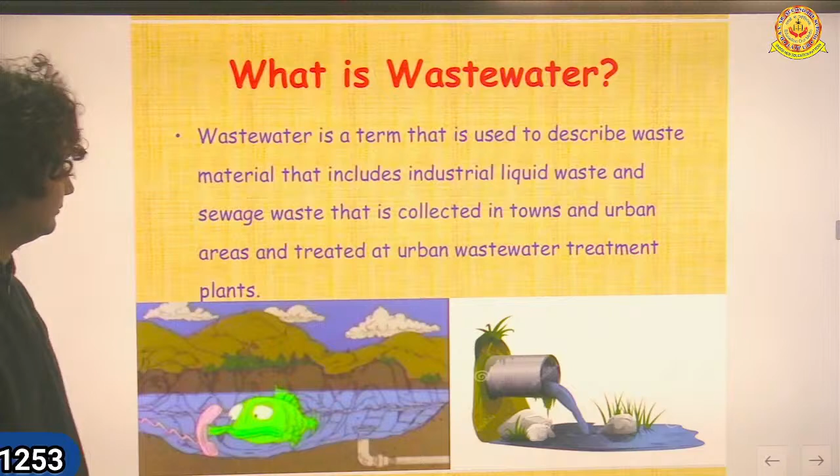See, how many times aquatic animals also are not able to live. They will die if we do not treat it well.

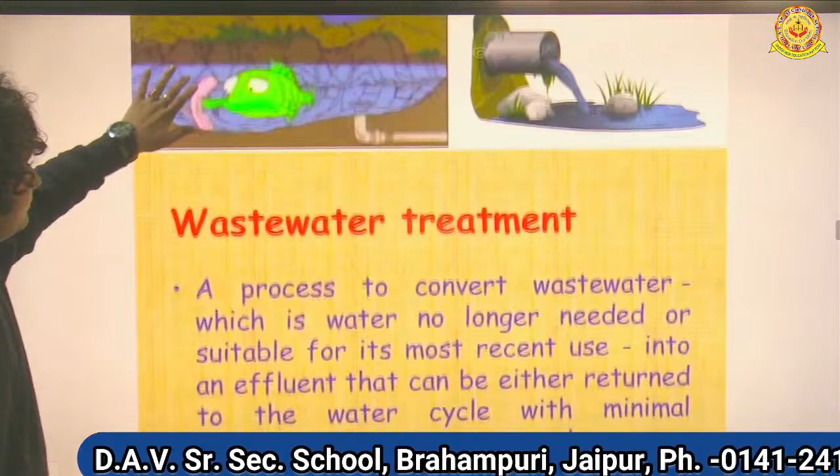Now, wastewater treatment is a process to convert wastewater, which is water no longer needed or suitable. Here, no longer needed or suitable means that is dirty water. That's why we say wastewater.

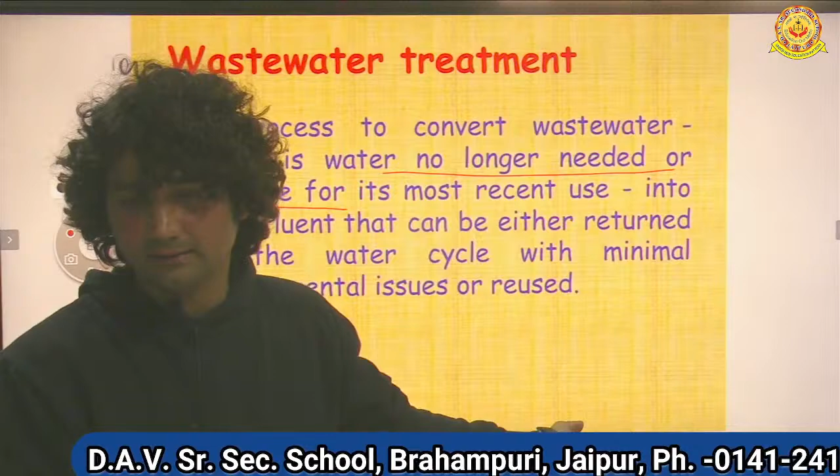It is a wastewater. So its most recent use is into an effluent that can be either returned to the water cycle with minimal environment issues, or reused. So this wastewater we can send to recycle and reuse again in the garden by removing dirt, by removing germs, bacteria.

So you all know what is wastewater treatment. Wastewater treatment is a process to convert wastewater into reusable water. We reuse this water again to give plants in gardening, for washing cars, bicycles, scooters.

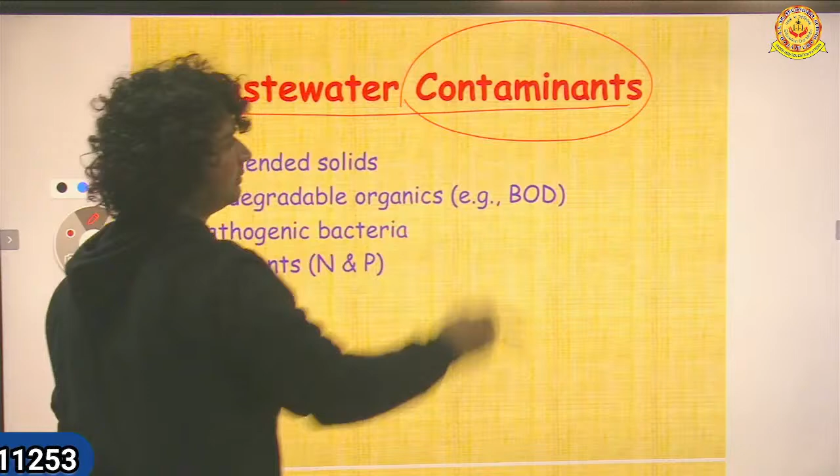Now, wastewater contaminants. So what do you understand by contaminants? Contaminants means it contains germs, bacteria.

So it is suspended with solid particles and biodegradable organics. Example, biodegradable waste. These are also included in wastewater.

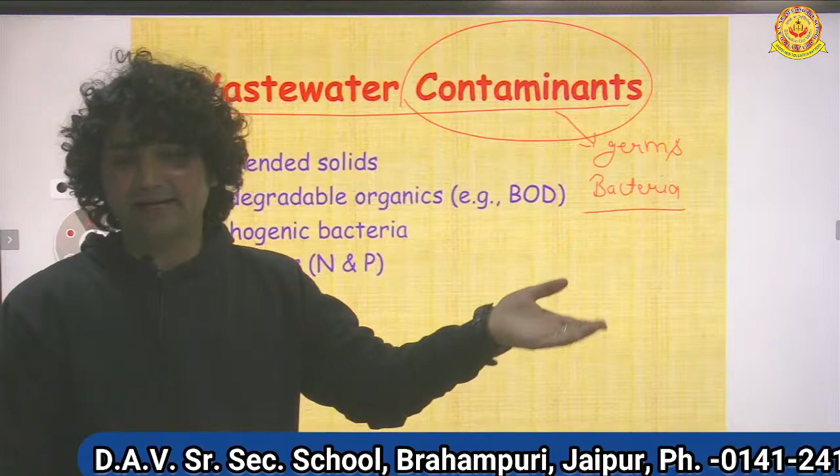Pathogenic bacteria and nutrients. Many times you have seen in the drains that water is too dirty. Bacteria in it. If someone drinks that water, what will happen?

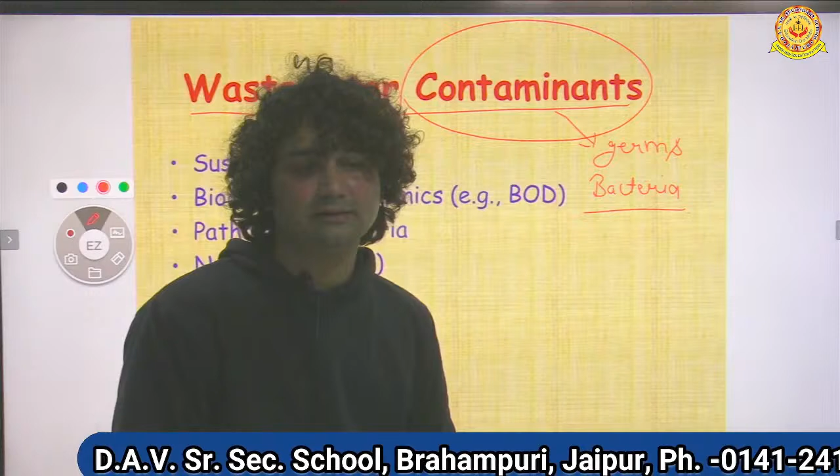They will not die, but it will cause a disease. They will have a disease, because that water is contaminated. In contaminated water there are germs and bacteria.

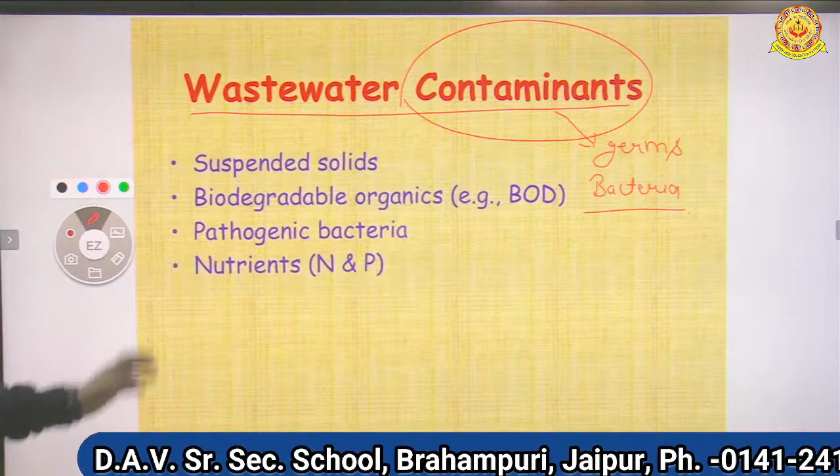Now you have understood it. What is wastewater contaminants? So wastewater contaminants, it contains germs and bacteria in it.

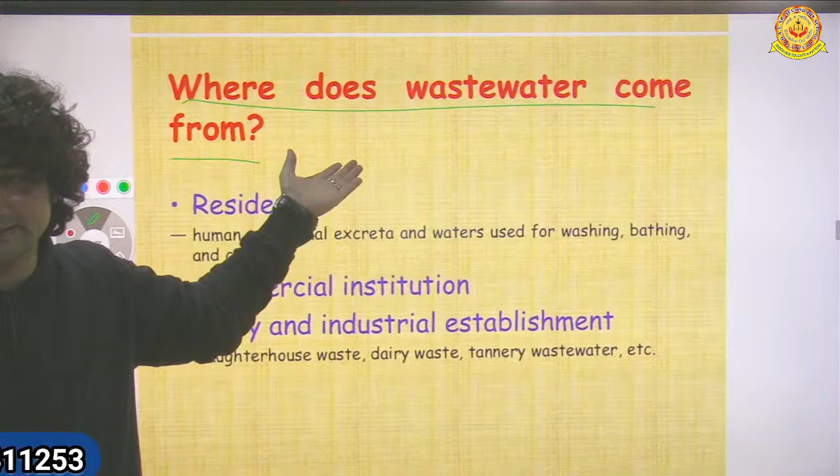Now, where does wastewater come from? This is the question. It has come from the households and industries, many large industries. It comes from and goes into the oceans and makes water polluted.

So it comes from the residences. You all know human and animal excreta, and water for washing, bathing and cooking. After that the water is wasted or made dirty, then it is sent into the ocean, seas, large seas.

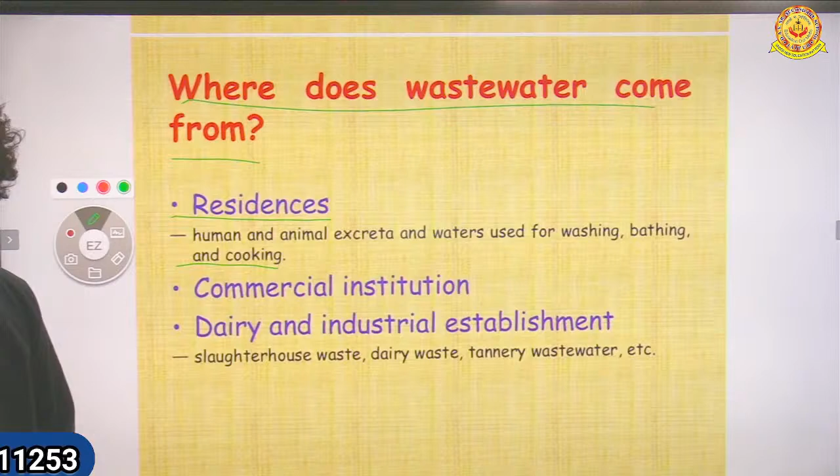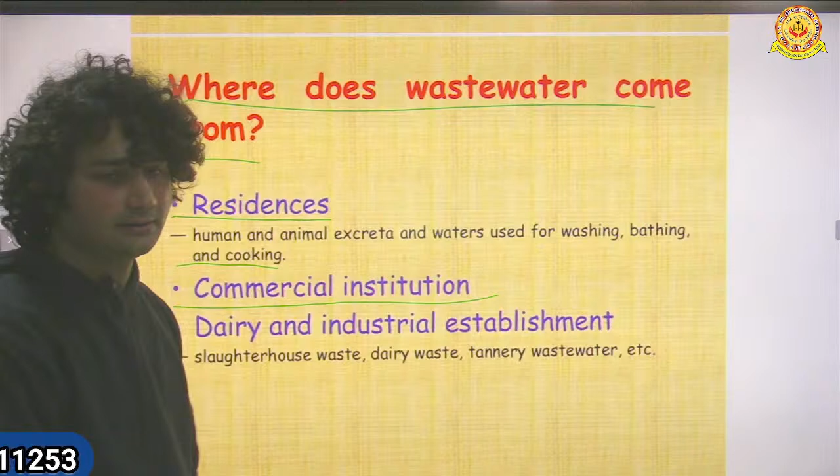It comes from commercial institutions. Many commercial institutes are there. From there they will release a large amount of wastewater.

Then dairy and industrial establishment: slaughterhouse waste, dairy waste, tannery wastewater. From there it also releases a large amount of waste. In a dairy waste we need to wash cattle also, animals. In industries we have to remove dirt. Many large industries also make fertilizers, so they use water and release wastewater.

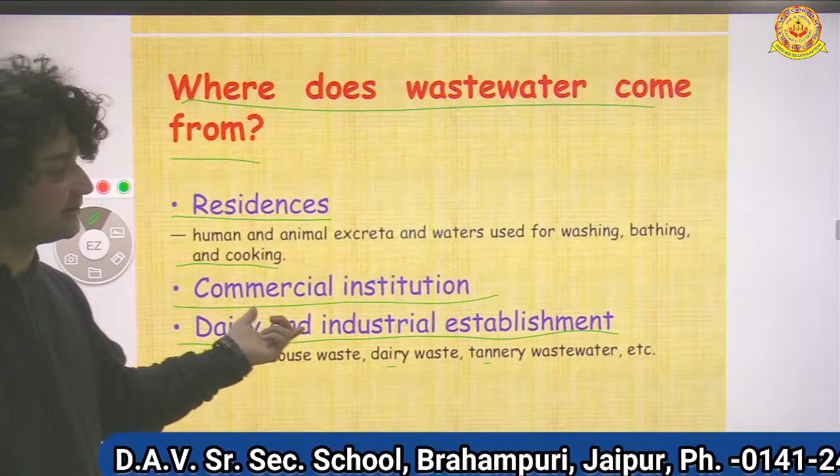So you all know where does wastewater come from? It comes from residence, meaning household, your house, and commercial institutions, and dairy and industrial waste, or large industries.

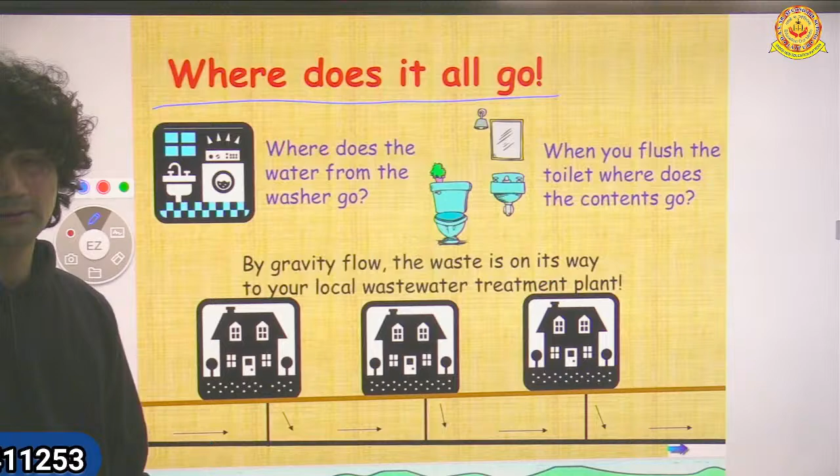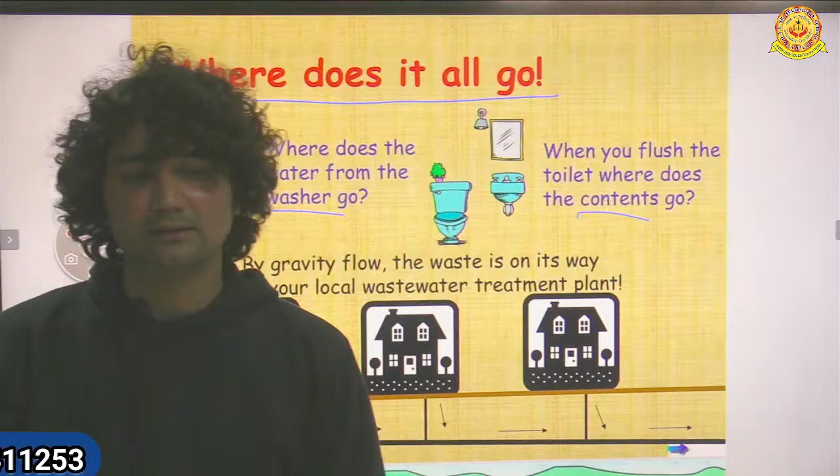Now, where does it all go? First, where does it come from? It comes from household or industries. Where does the water from the washer go? When you flush the toilet, where does the contents go? All the contents, contaminated with germs and bacteria, by gravity flow, the waste is on its way to your local wastewater treatment plant. From your household or your industries, it goes to the wastewater treatment plant.

Okay, who will give the answer? What would happen in a wastewater treatment plant? In a wastewater treatment plant, we remove the dirt and dust from it and make reusable water, so we can reuse it again and again.

On our earth we have 70% water and 30% land. In that 70% of water, we have only 1% fresh water. That's why we have to use this water carefully. We don't have to waste this water.

Many places you have seen there is no water. So how can people survive there? That's why we have to reduce this. Reduce less and reuse again and again.

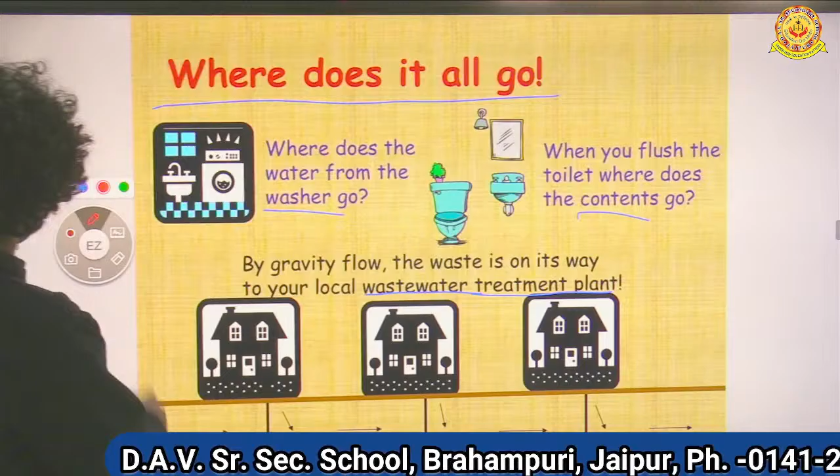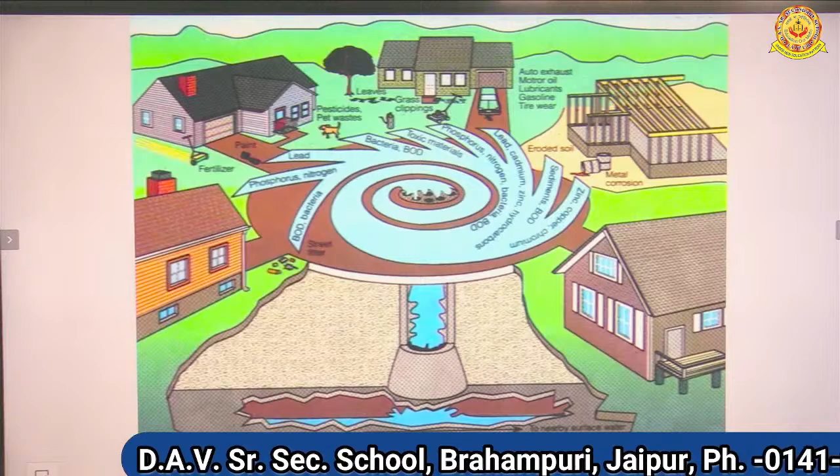Now the question is, why treat wastewater? Why is it necessary to treat wastewater? First, it causes a demand for dissolved oxygen. We treat wastewater to increase the level of oxygen in it.

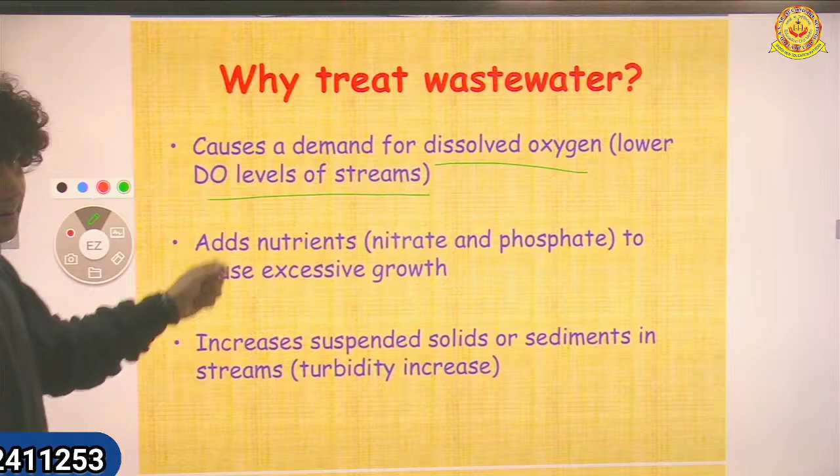If there is more dirt or germs in the wastewater, the oxygen level decreases. That's why we have to treat this wastewater and increase the oxygen level in the streams. By increasing the oxygen level, it cannot harm aquatic plants or animals. If the oxygen level decreases, the aquatic plants and animals will die because they are not able to take in oxygen that is soluble in water.

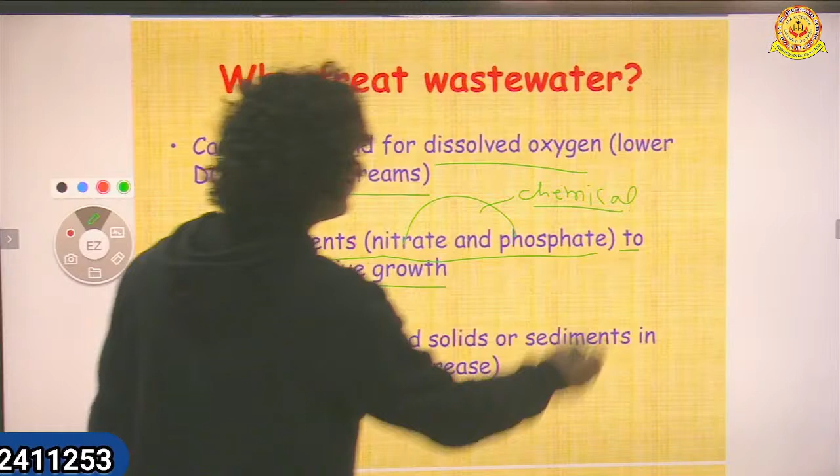Now, it adds nutrients like nitrate or phosphate to cause excessive growth. We need to consider nutrients in the form of nitrate and phosphorus, which are chemicals, because we have to stop this excessive growth of bacteria or contaminants.

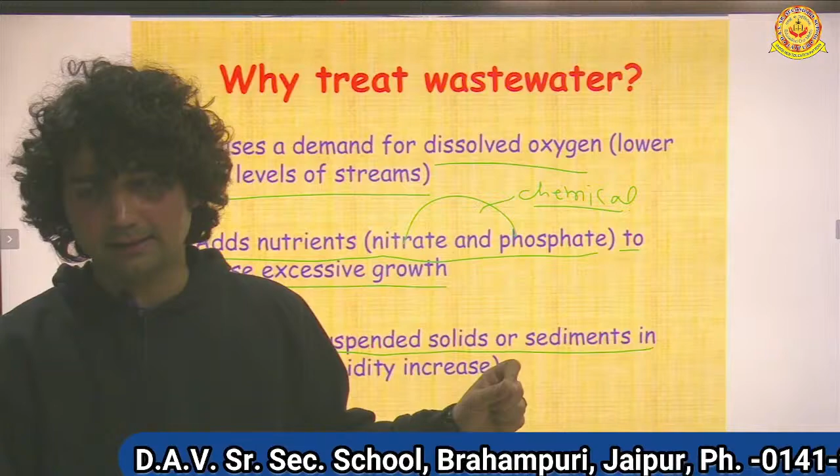Now the third point, the last point, is increase in suspended solids or sediments in streams, causing turbidity to increase. In solids you have many small pieces of stones mixed with soil when the water is streaming, and many such things increase turbidity.

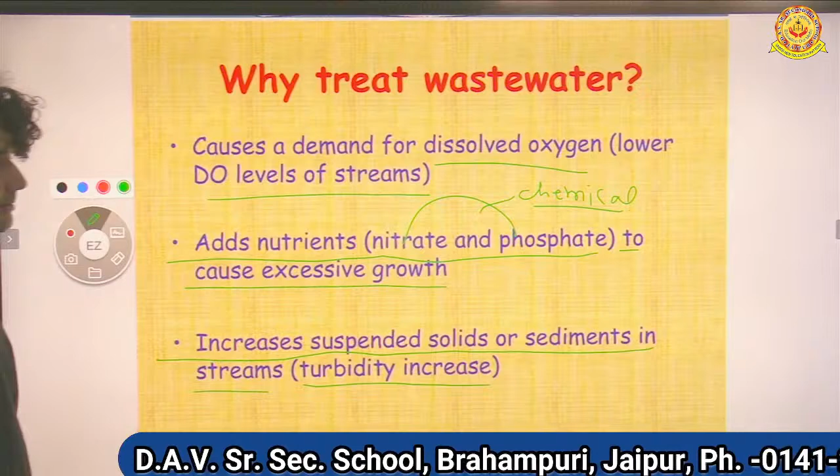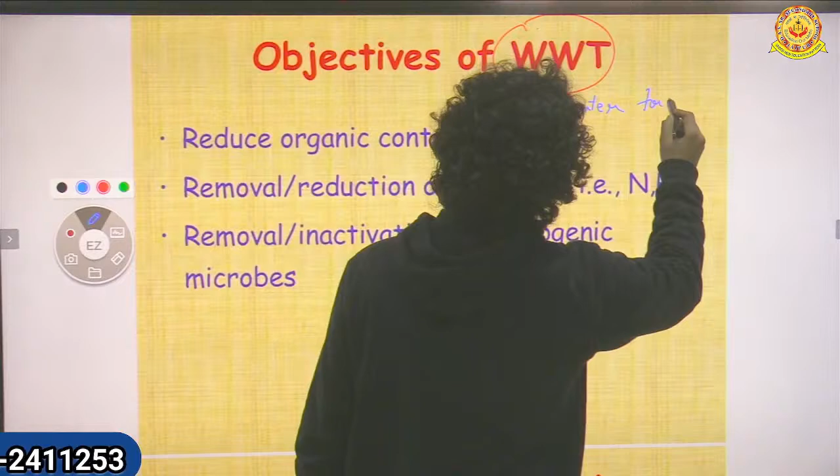Now, objectives of WWT. What is WWT? It is wastewater treatment. So what are the objectives of wastewater treatment? This is the main objective of wastewater treatment.

Reduce organic content, meaning biodegradable waste, BOD. We have to reduce that. Now, removal and reduction of nutrients, NP - nitrogen, nitrates and phosphorus. We have to remove these nutrients, N for nitrates and P for phosphorus.

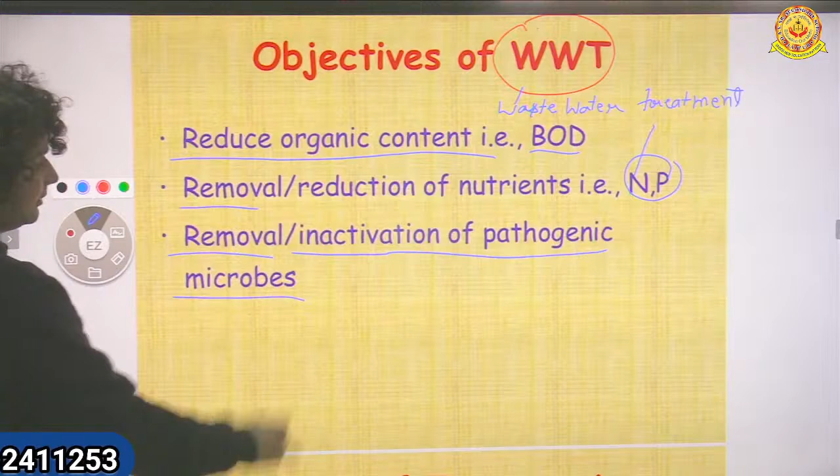Now, removal or inactivation of pathogenic microbes. We have to remove these pathogenic microbes. Pathogenic microbes are those that cause disease to us by drinking wastewater or harmful water. Understood? So we have to remove these pathogenic microbes - they cause diarrhea and jaundice when we drink wastewater or dirty, unsafe water.

So these are the objectives of WWT. You all know the meaning of WWT - wastewater treatment - by reducing organic content (biodegradable waste), removal of nutrients (nitrates and phosphorus), and removal of pathogenic microbes. Have you all understood the objectives of WWT?

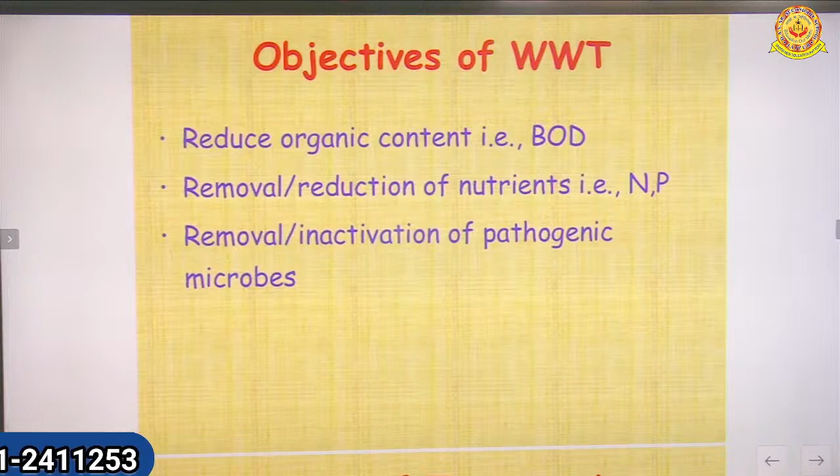Now, levels of treatment. There are multiple levels for treatment of wastewater, for reusing this water again. So what are the levels of treatment? First is primary - a process of removal by physical separation of grit and large objects, material sent to landfill for disposal. Here we remove grit and large objects from wastewater.

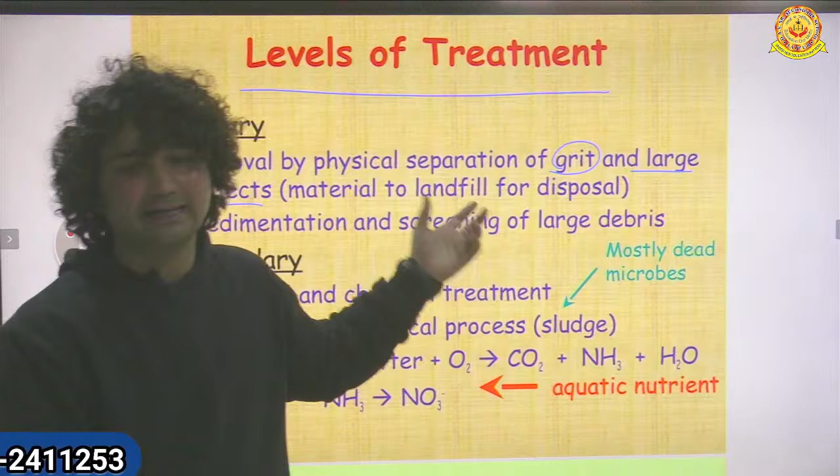These objects are used for landfill, and you all know the landfill process - we dig up a pit and decompose all non-biodegradable waste in it, covered with layers of soil. That is the landfill process.

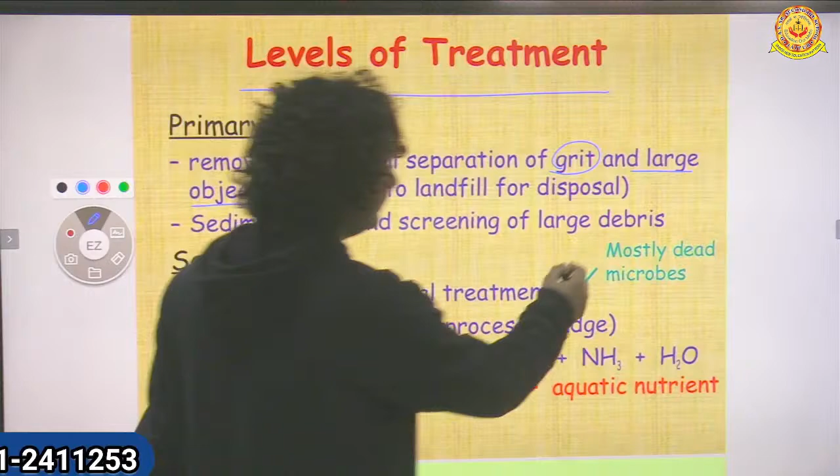And sedimentation and screening of large debris. Debris means malba in Hindi - large amounts of waste, like kachra. That debris settles as sediment in the wastewater or down in the water. Now, the secondary process involves biological and chemical treatment.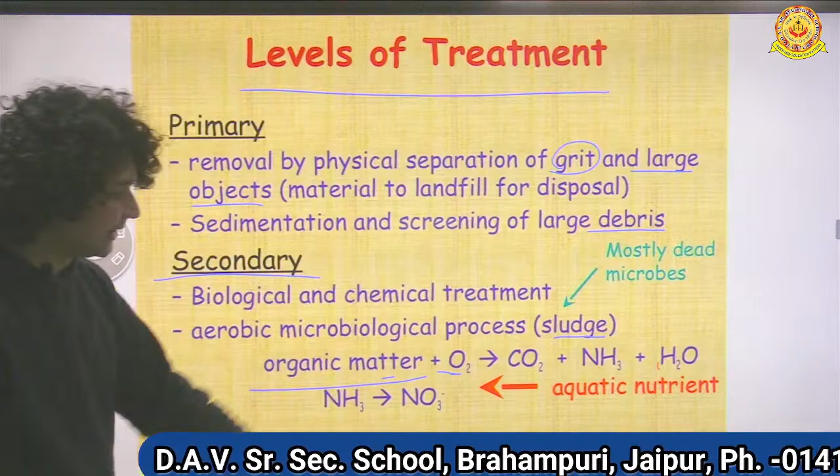Biological and chemical treatment we found in this level. Aerobic microbiological process, that is sludge. Sludge is a microbes, dead microbes, and organic matter. Organic matter plus oxygen makes carbon dioxide, it increases carbon dioxide plus NH3, ammonia plus hydrogen, water plus NH3, it gives nitrates. It is an aquatic nutrient.

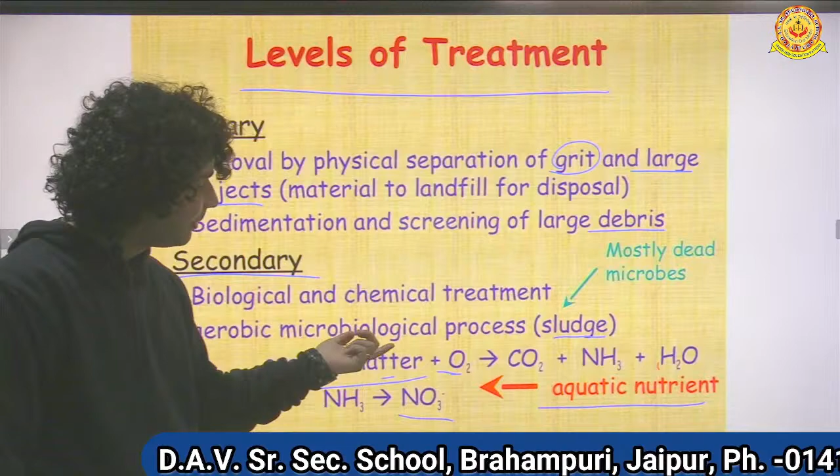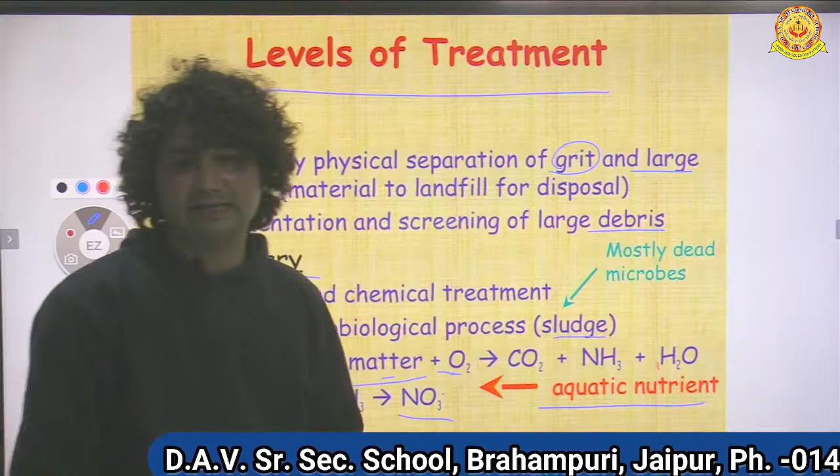So in primary, we have to remove the grit and large objects by sedimentation. Then in secondary we remove biological matter. In biological we found both biodegradable and non-biodegradable things, we have to remove this. Then in secondary, the second point is we have to remove microbiological process, that is too small. We found it in the form of sludge, and we have to remove this. Sludge is a waste, it is a kind of waste.

So have you all understood the levels of treatment, primary and secondary? Yes, sir.

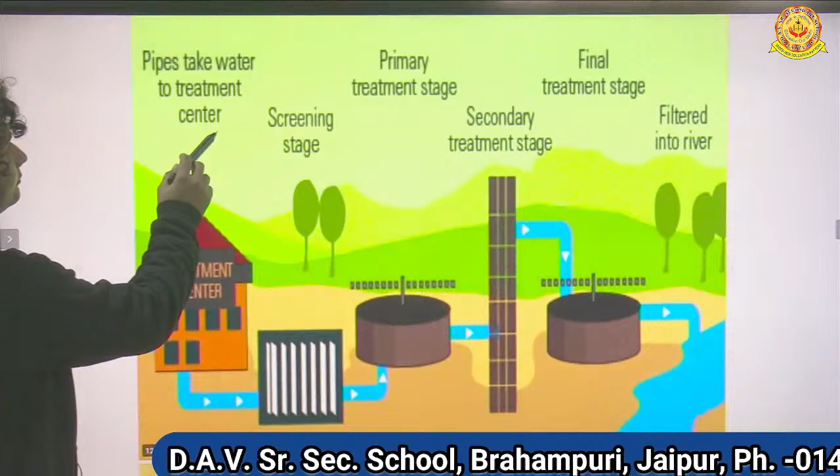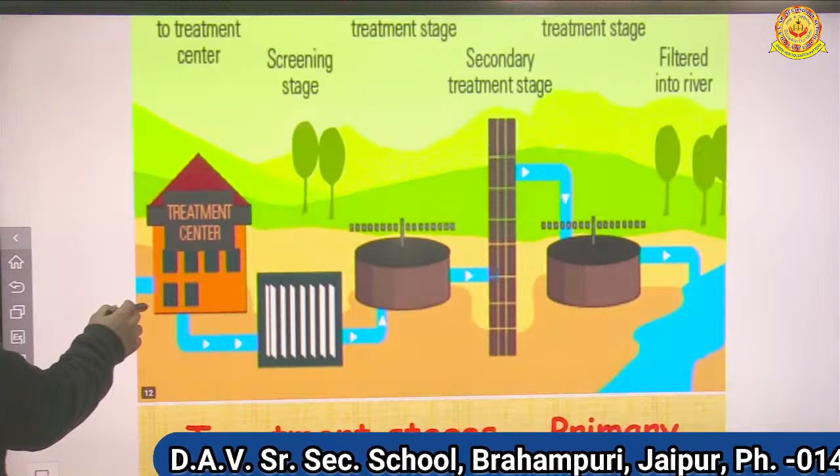This is a primary treatment stage. In the primary treatment stage we remove grit and large objects. That is the secondary treatment stage. In secondary treatment stage we remove sludge or sedimentation of microbiological matter.

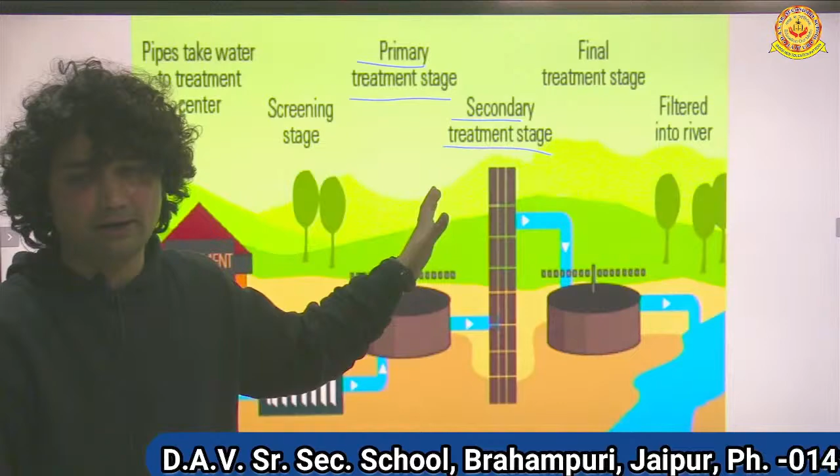See this is a treatment center, and after the whole process we remove the filtered water into the river. The pipes from our houses take wastewater to the treatment center.

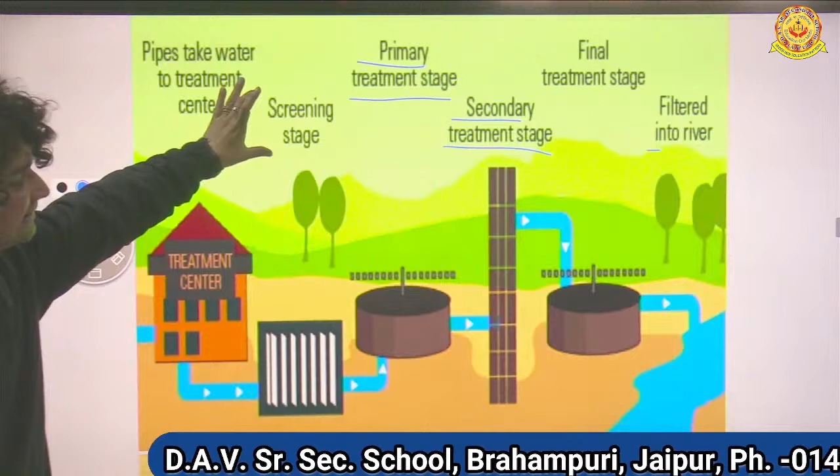So after the screening stage - this is the screening stage, in the screening stage we remove the waste, grit and large objects. Then in primary stage we remove small particles. Then in secondary we remove microbiological particles like sludge. Then we filter it into the river.

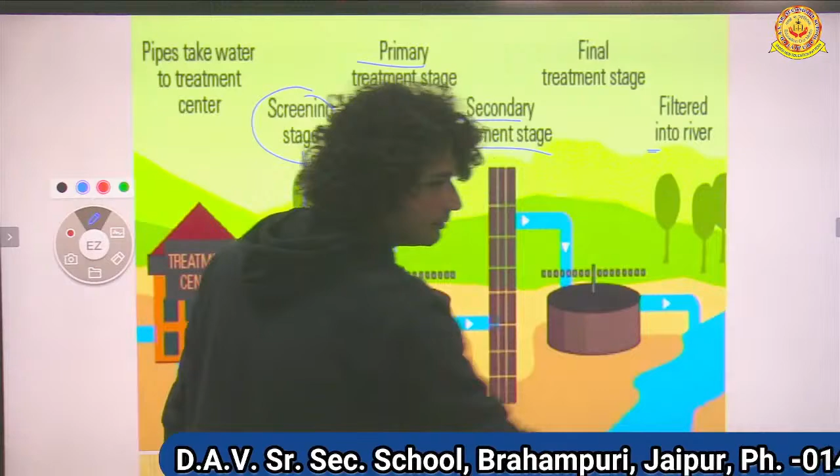Now, treatment stages of primary treatment. This is the treatment stage of primary treatment. It involves very typical materials. In this process we found very typical materials that are removed during primary treatment, including fats, oils and greases. You all know fats, oils and greases - many times you have found them, right? It is typical to remove this kind of thing.

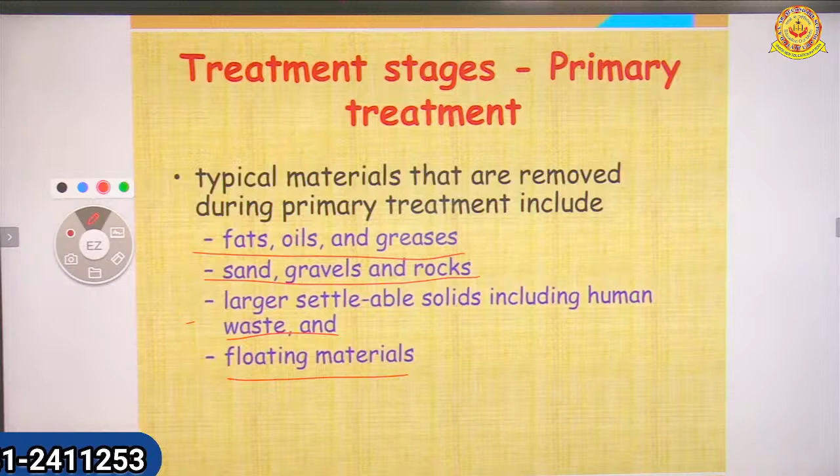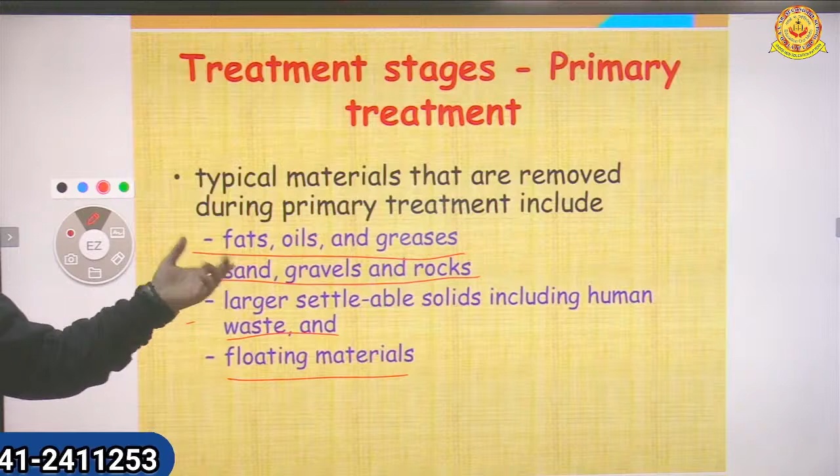It is very difficult - sand, gravel and rocks. Large settleable solids include human waste and floating materials. So this kind of waste is very typical in the primary stage to remove. And you all know, when fats, oils and greases mix with water, it is hard to remove. Whenever your mother washes the plates or utensils, she knows how to remove this dirt - this fats, oils and greases. So it is a hardly removable substance, and it occurs in the primary treatment, in the first level of treatment.

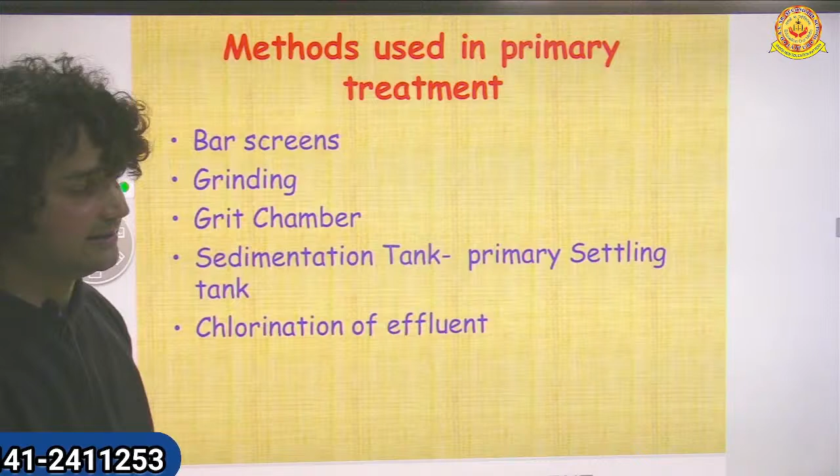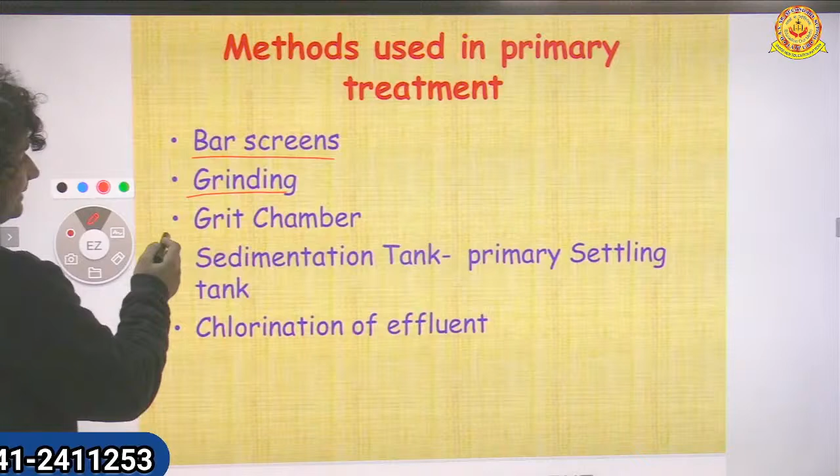Now, methods used in primary treatment. What kind of methods do we use? First is bar screening, second is grinding, third is grit chamber, fourth is sedimentation tank, that is primary settling tank, and the fifth is chlorination of effluent - we dissolve chlorine to remove or kill germs. So these methods are used in the primary treatment.

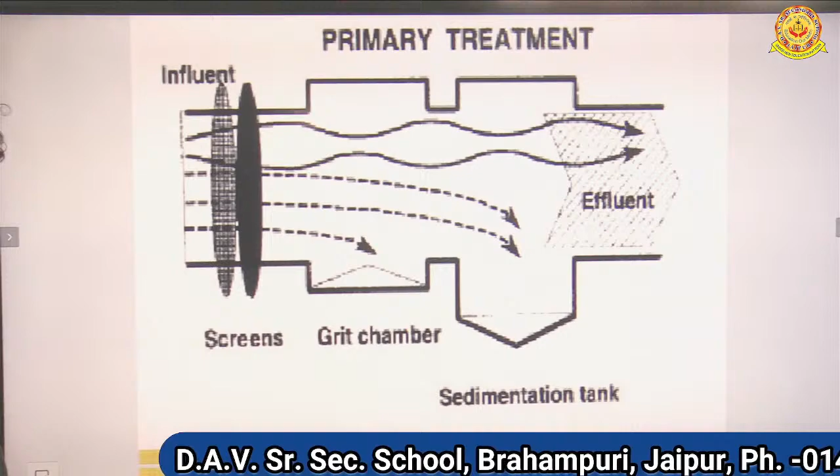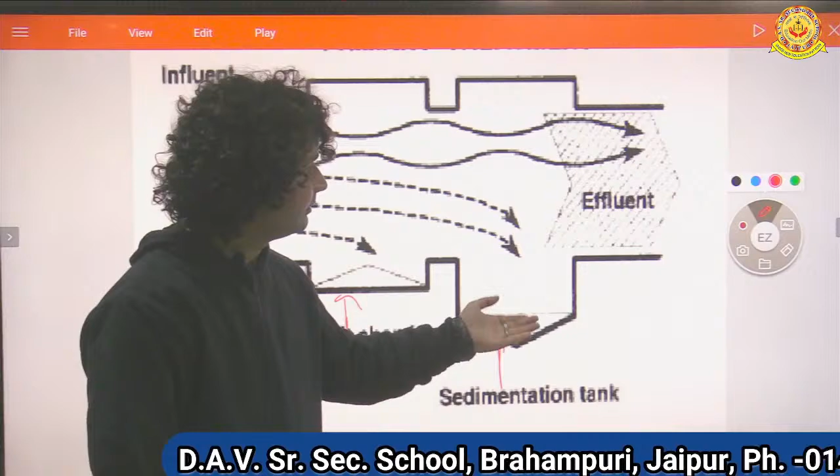See this primary treatment, see this diagram. That is a grit chamber. That is screening, that is grit chamber, that is sedimentation - here in sedimentation, soil and stones remain here. Then effluent - effluent means we can remove the reusable water or filtered water, we can remove it from this side. This is the influent, that is the effluent.

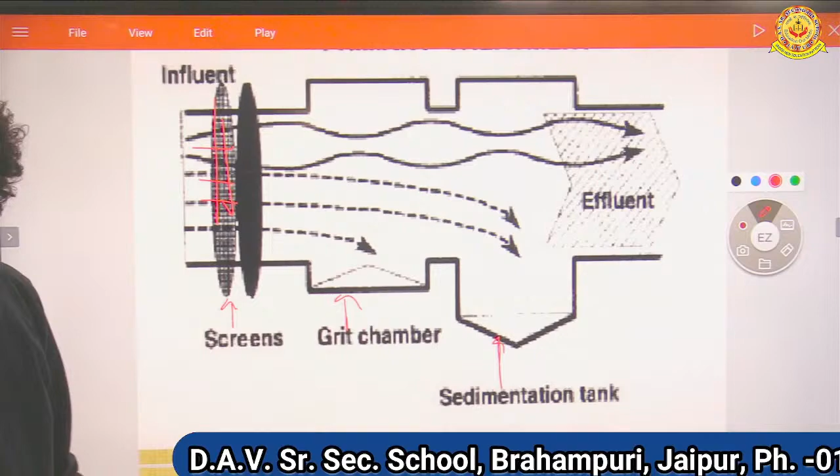Influent we release in screening, or remove dust from screening. That is screening - from the screening we remove dust and grease, oil, fats. Then after, we remove grits, a coarse particle. Then in the sedimentation tank we remove sediment. You all know sedimentation - without disturbing the sand and stone, we remove or release water. That is the sedimentation process.

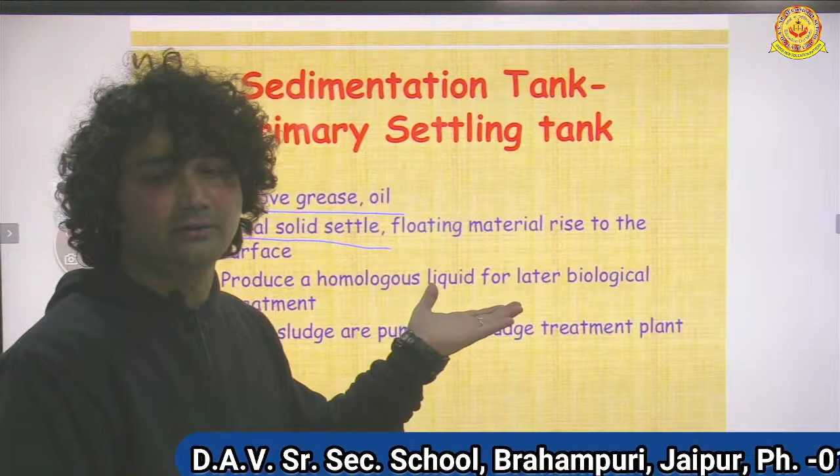Now, sedimentation or primary settling tank. In a sedimentation tank, primary settling tank, here we remove grease or oil - this is the most hardenable or typical thing we are removing. So in the process of the sedimentation tank, we remove grease and oil, we remove fecal solids that settle, that is floating material that rises to the surface of the wastewater and makes it polluted.

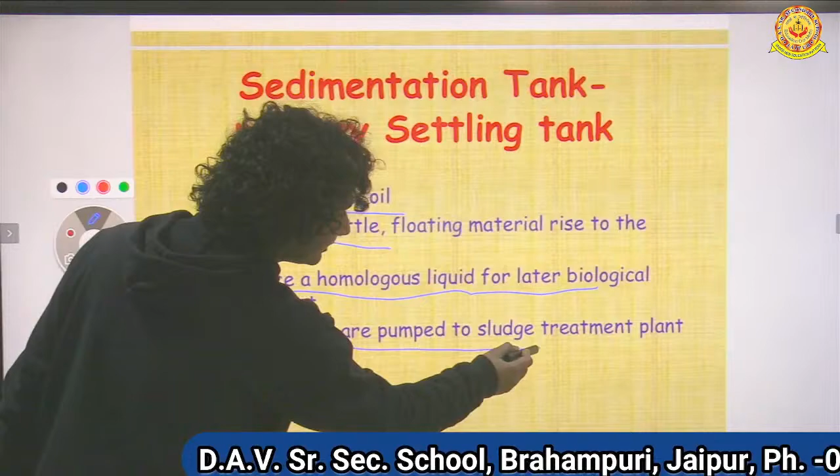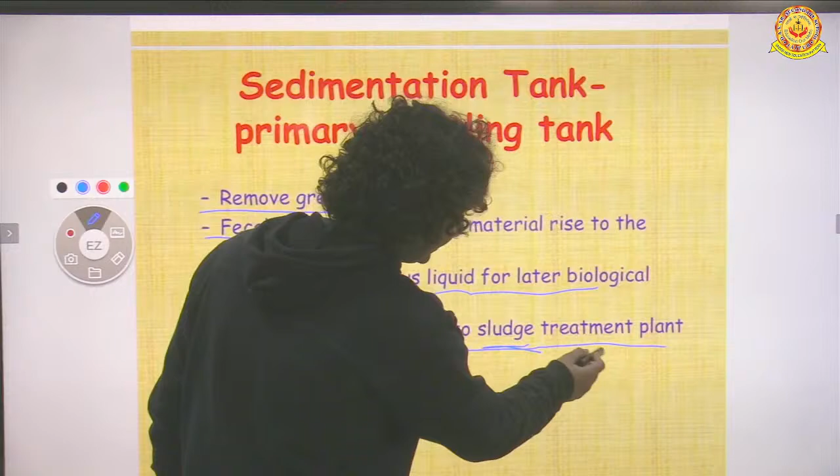Now it produces a homogeneous liquid for later biological treatment - that goes for biological treatment. Now fecal sludge is pumped to the sludge treatment plant. We remove this sludge to send it into a sludge treatment plant where we can treat the sludge. Here we treat sludge in the sludge treatment plant, STP - STP means sludge treatment plant.

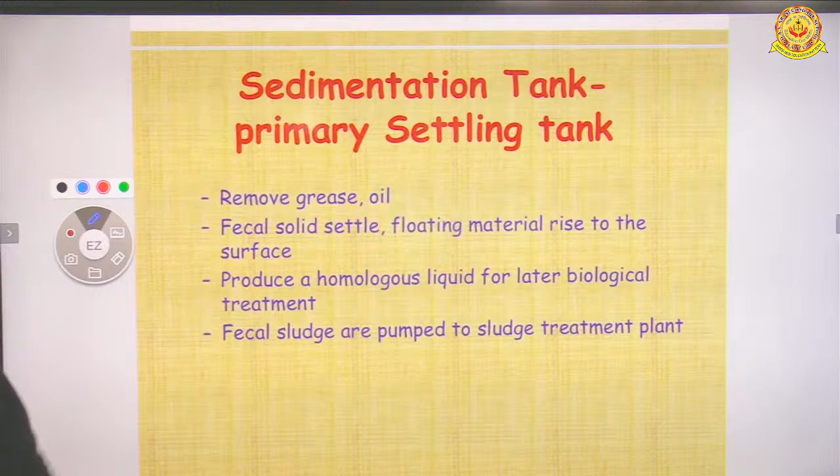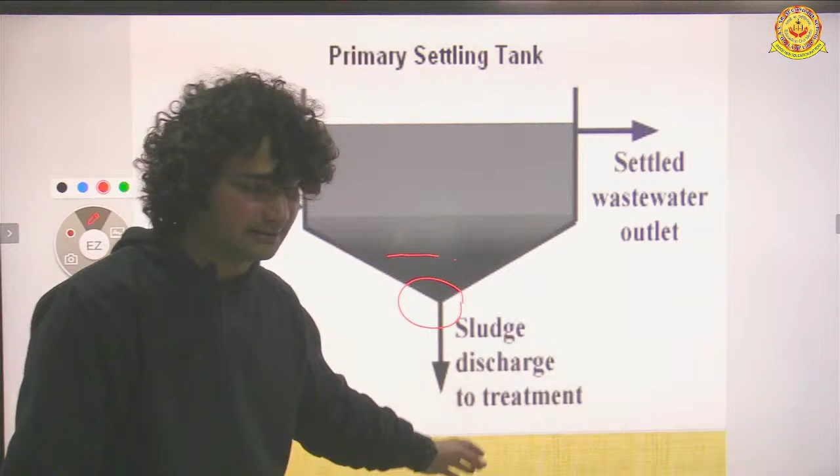Sludge, whatever the waste of animal, chemical, or industrial waste, it is settled down and removed from here. It is settled down here and removed from this side. So this is the sludge discharge treatment.

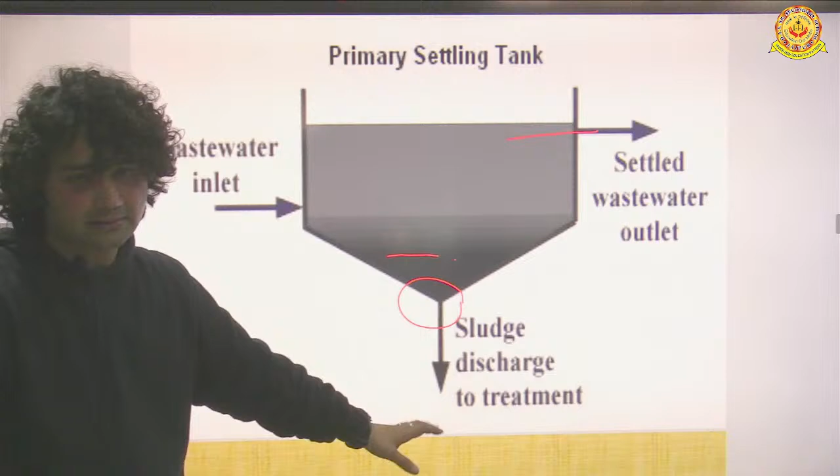After the settling down in this treatment, we release water from this side. This is the heavy particles that we remove from the bottom. So have you all understood the primary settling tank?

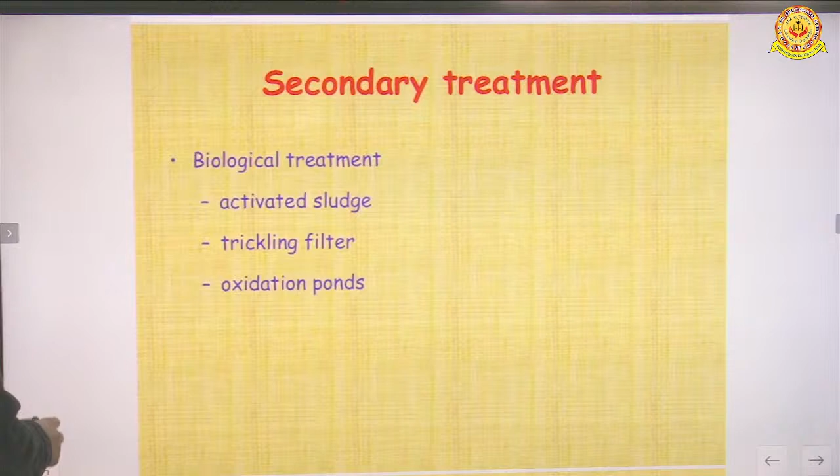Now secondary treatment. It is a biological treatment: activated sludge, then trickling filter, after that it increases oxidation ponds. It increases the oxidation, meaning increases the oxygen level into the ponds. So these are the treatments of secondary treatment.

Now, activated sludge process. How do we activate this sludge process? When primary wastewater is mixed with bacteria-rich or activated sludge, air or oxygen is pumped into the mixture. We have to send it into this mixture. Both aerobic and anaerobic bacteria may exist in it.

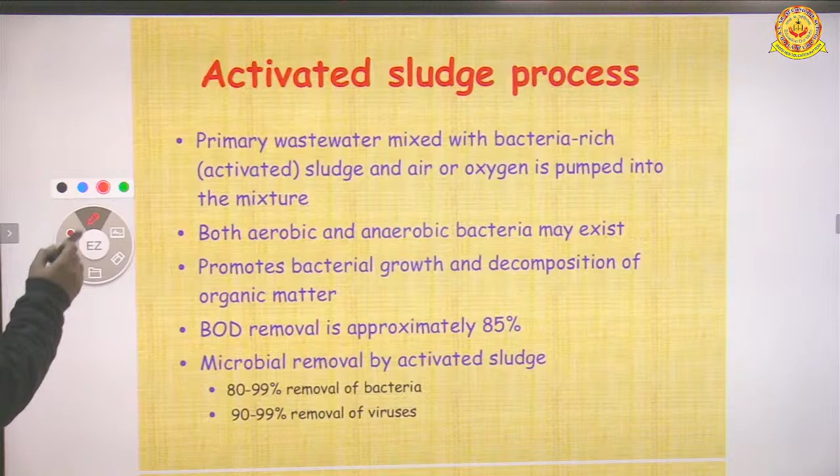It promotes bacterial growth and decomposition of organic matter. What does it promote? It promotes bacterial growth, increases the bacterial growth in the sludge process. When the bacteria increases, what will happen? It pollutes water more, or it can harm us.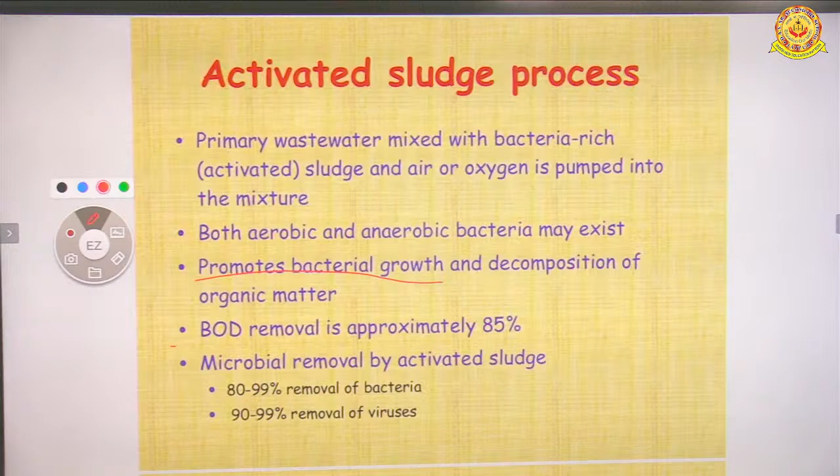BOD removal is approximately 85%. Biodegradable removal is approximately 85%. In this process, 85% of BOD, biodegradable matter, is removed.

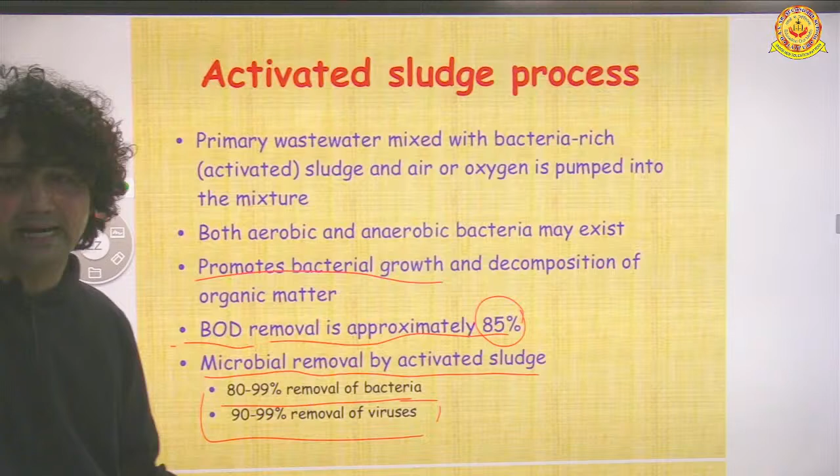Microbial removal by activated sludge: when we activate this sludge, we remove microbial matter, 80 to 99% removal of bacteria, and 90 to 99% removal of viruses that cause disease. By activating the sludge process, we remove bacteria 80 to 99%, and viruses 90 to 99%.

Fifth is physical components. What are the physical components? There are some physical components, like the aeration tank, a tank used to introduce oxygen or increase the level of oxygen. Aeration source finds out if there's an adequate amount of oxygen or not. It is fed into the tank to provide pure oxygen.

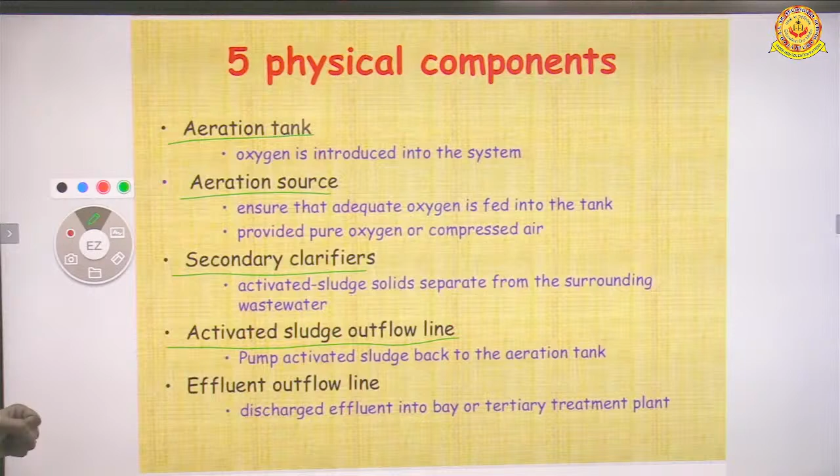Secondary clarifiers: activated sludge solids are separated from surrounding wastewater. Then the activated sludge outflow line pumps activated sludge back to the aeration tank. Then the effluent outflow line discharges this water into a bay or tertiary treatment plant. After this process, we discharge this wastewater into another treatment plant. So these are the five physical components of wastewater treatment.

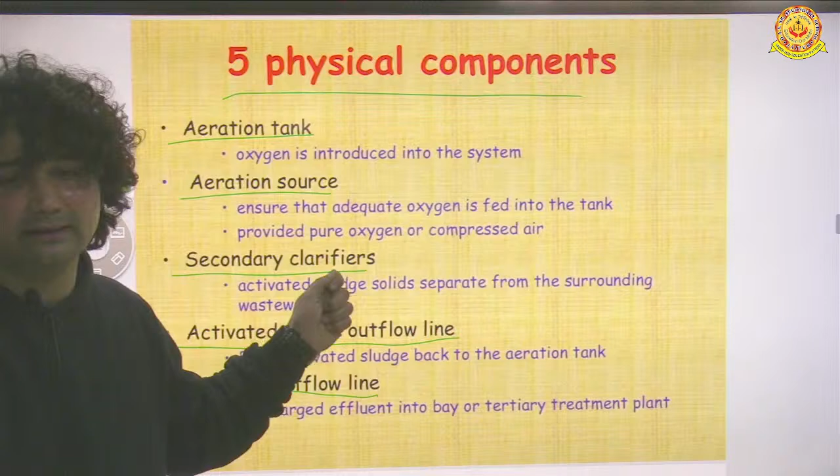First is the aeration tank, where we increase the oxygen level in water. The aeration source describes where the oxygen comes from, the adequate oxygen fed into the tank, providing pure oxygen or compressed air.

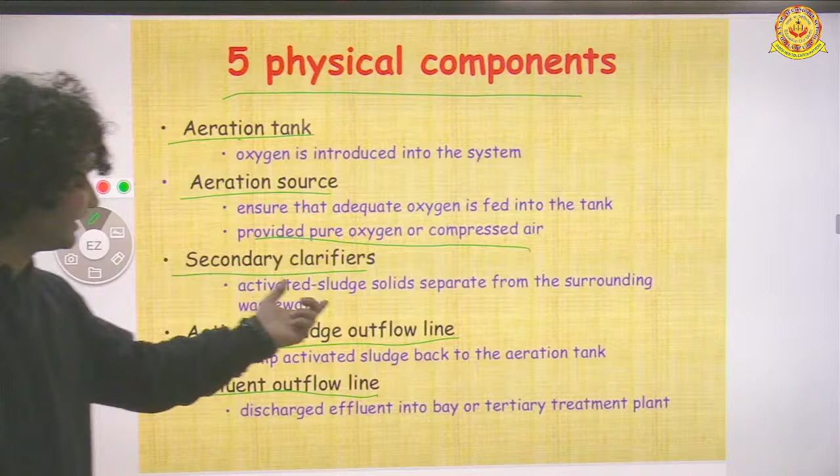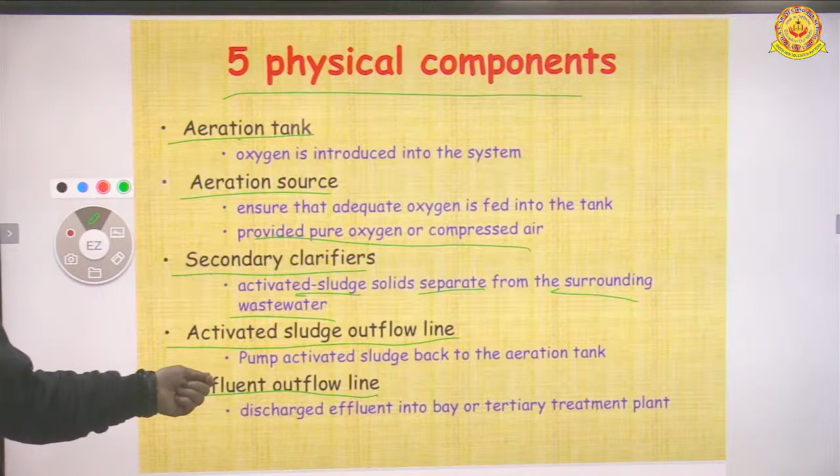In secondary clarifiers, activated sludge solids are separated from the surrounding wastewater. We have to separate and remove it. After separating sludge from wastewater, it is sent into the outflow line of activated sludge, where it is pumped back to the aeration tank.

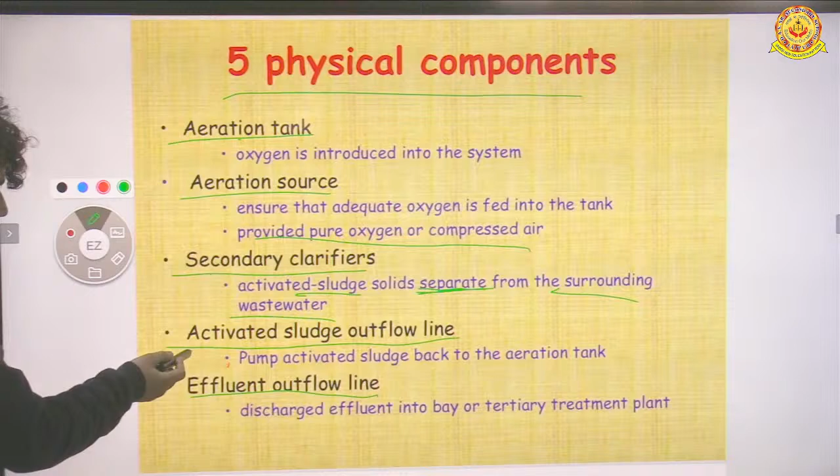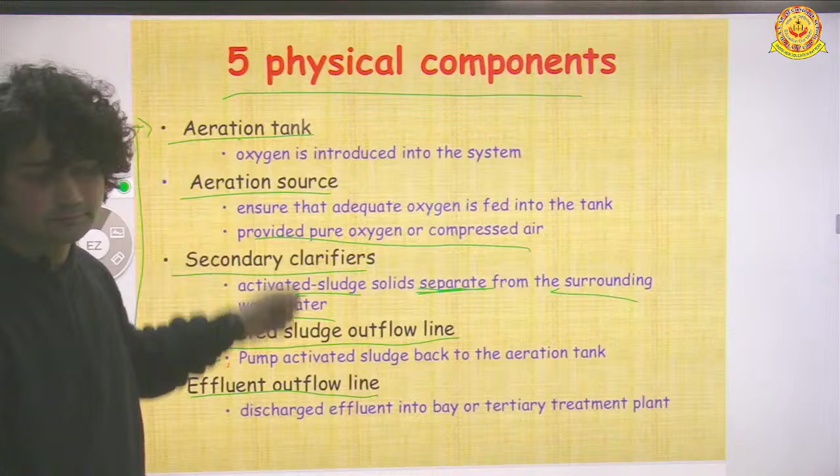After separating this sludge from the surrounding wastewater, the activated sludge is again pumped into the aeration tank to increase its oxygen level. Then, through the effluent outflow line, we discharge effluent into a bay or tertiary treatment plant or another treatment plant. So have you all understood this treatment? Yes, sir, 5 physical components.

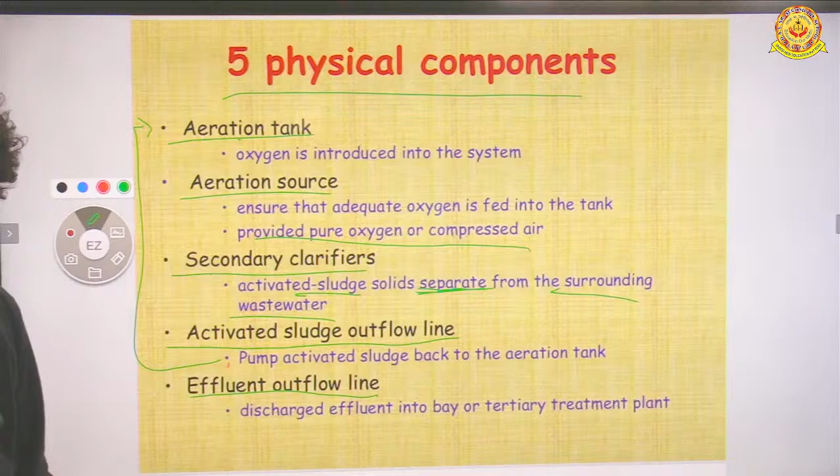Now see this. This is raw water, and we add air in it - the aeration tank, we can say. Here we increase the air or oxygen level. Then it's sent to the clarifier-settler, or treated water.

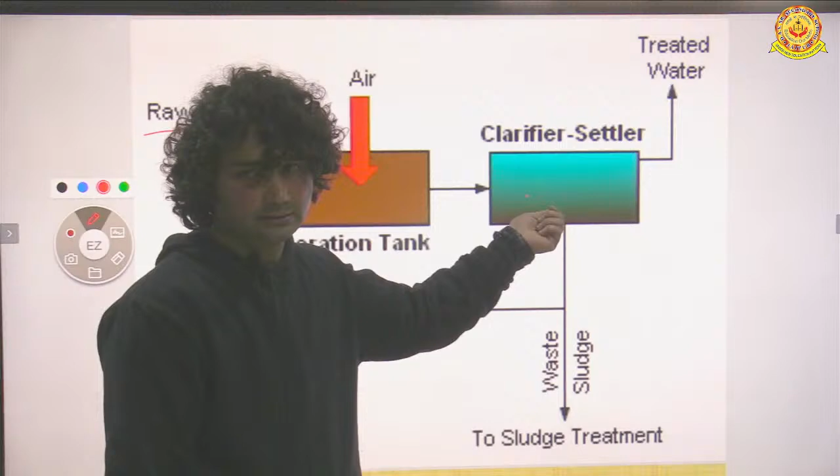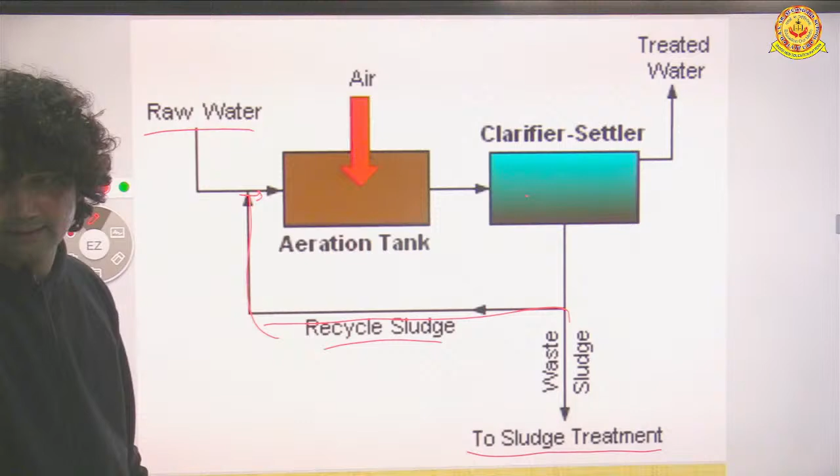Here we remove or filter the water. Then it is sent to sludge treatment, where we separate sludge from the surrounding wastewater. After recycling the sludge, we send it back into the aeration tank to increase the air level again. Then it is sent to another water treatment plant. Have you all understood? Yes, sir, thank you.